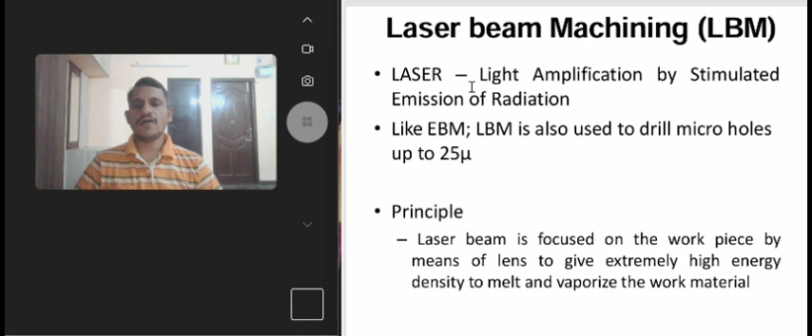Construction and working of laser beam machining. The schematic arrangement of the laser beam machining process is shown in the figure. There are several types of lasers used for different purposes, for example solid state laser, gas laser, liquid laser, and semiconductor laser. In general, only the solid state laser can provide the required power levels.

The most commonly used solid state laser is the ruby laser. It is the first successful laser, achieved by Maiman in 1960. It consists of a ruby rod surrounded by the flash tubes. This is the ruby rod surrounded by the flash tubes. Synthetic ruby consists of a crystal of aluminum oxide in which a few of the aluminum atoms are replaced by chromium atoms.

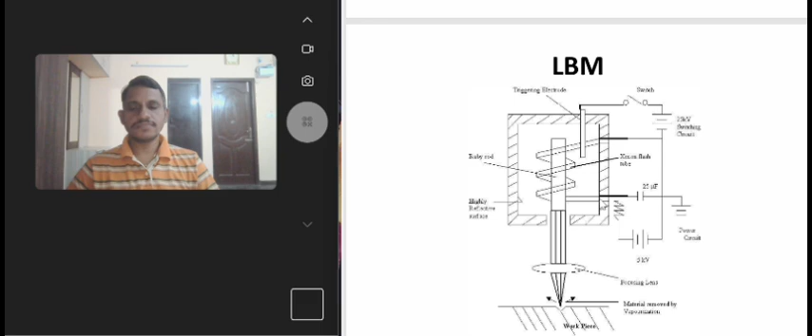The laser head is transferred over the work material by manually adjusting the control panel, and an operator can visually inspect the machining process. The actual profile is obtained from a linked mechanism made to copy the master drawing or actual profile placed on a nearby bench. This is another schematic diagram of how the laser beam is focused on the workpiece.

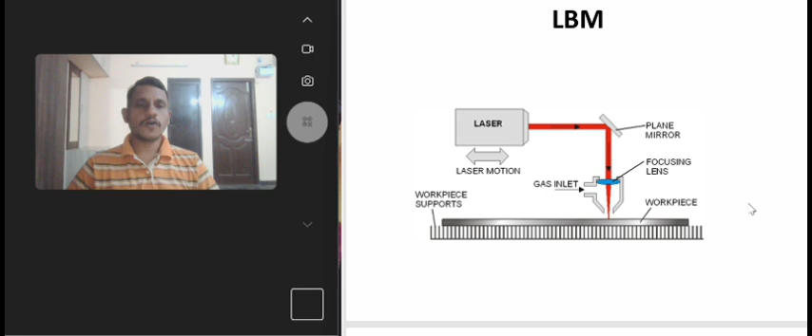Accuracy of laser beam machining. The laser beam is used for cutting and drilling. In order to achieve the best possible results in drilling, the material should be placed within a tolerance of plus or minus 0.2 mm of the focal point.

Laser materials used in the laser beam machining process. Many materials exhibit lasing action, but only a limited number are used in metal working. Solids, gases, and semiconductors can be used as lasing materials. Solid state lasers: the ruby laser, the neodymium doped yttrium aluminum garnet, Nd:YAG laser, and the neodymium doped glass laser, Nd-glass, are examples of solid state lasers. The most commonly used solid state laser is the ruby laser.

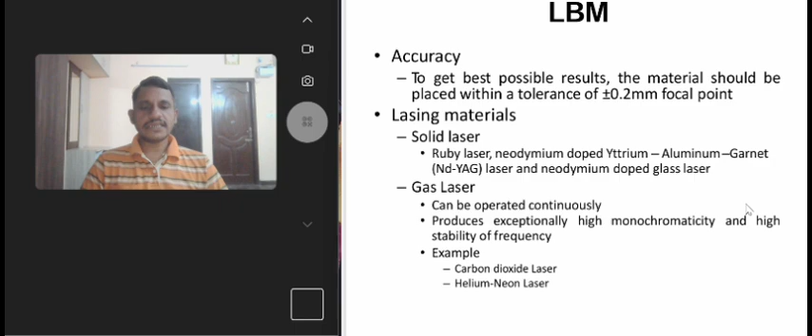Gas laser. The main advantage of a gas laser is that it can be operated continuously. The gas laser produces exceptionally high monochromaticity and high stability of frequency. The output of the laser can be changed to a certain available wavelength. So gas lasers are widely used in industries. Examples are the carbon dioxide laser and helium neon, which is called the He-Ne laser.

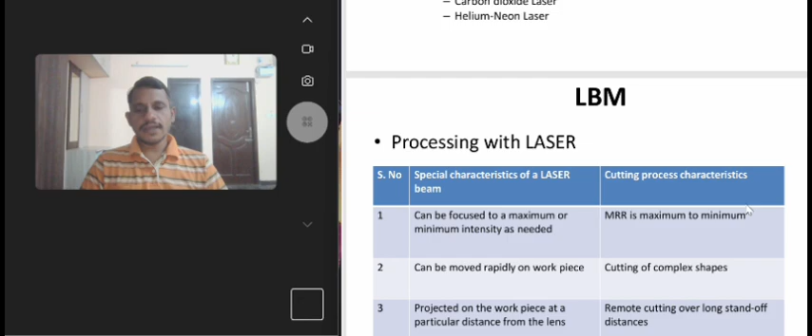Third one is semiconductor laser. Lasing action can also be produced in semiconductor. The most compact type of laser is semiconductor laser. It is also known as injection laser. In its simplest form, the diode laser consists of a PN junction doped in a single crystal of a suitable semiconductor, for example, gallium arsenide.

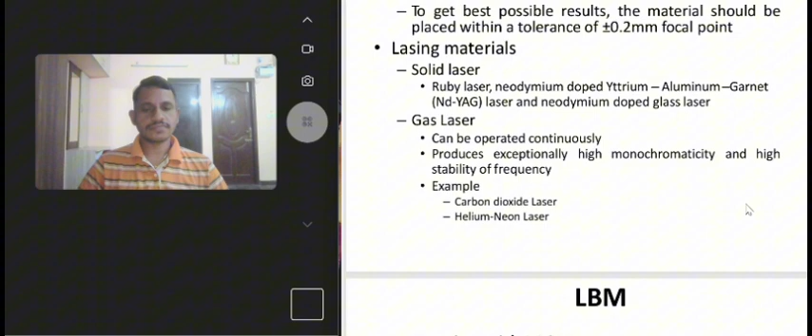Processing with lasers. It can be focused to maximum intensity or to minimum intensity as needed. Cutting process characteristics: metal removal rate is maximum to minimum. Second point, in special characteristics of laser beam, it can be moved rapidly on the workpiece. In cutting process characteristics, cutting of complex shapes.

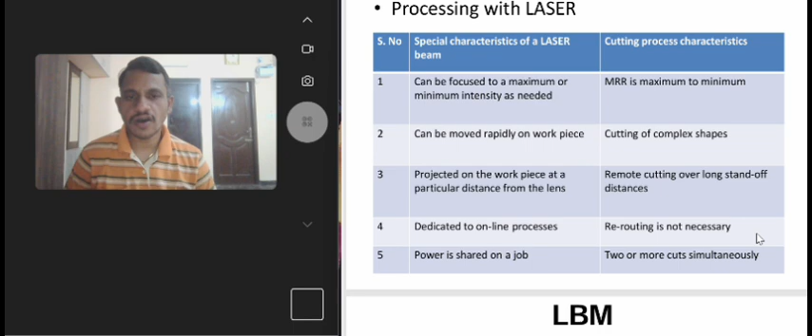Third point, it is projected on the workpiece at particular distance from the lens. Special characteristics of laser. Cutting process characteristics: remote cutting over long standoff distance. Dedicated to an online process. Rerouting is not necessary. Power is shared on a job. Two or more cuts simultaneously.

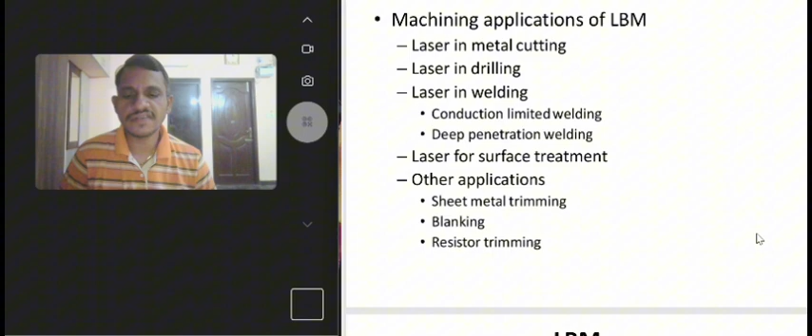Machining application of laser. A laser has a wide range of machining applications. Laser in metal cutting. A laser beam can be used for cutting metals, plastics, ceramics, textiles, clothes, and even glasses when its surface is coated with radiation absorbing materials such as carbon. Normally, laser cutting starts by drilling a hole through the workpiece, then moving along a predetermined path of a shape to be cut. Steel, titanium, nickel, and plastic can be cut easily by using laser beam.

But cutting of aluminum, metals, and copper is very difficult, since these metals tend to reflect the applied heat. The cutting speed of the laser depends on the material being cut, its thickness, frequency, physical characteristics, and the output power of the laser beam.

Laser in drilling. Laser drilling was one of the first practical applications of laser technology in industry, and the demand for laser drilling is increasing. Hole drilling by laser is a process of melting and vaporizing unwanted materials by means of narrow pulsed laser operating at 3 to 95 pulses per second.

Due to melting and vaporizing process, high accuracy is not possible in laser drilling. So laser drilling is not suited for deep hole drilling and for producing perfect cylindrical holes. Laser drilling is used in watch jewels, diamonds, dies, and other machining parts for various industries where a particularly high level of precision is not demanded.

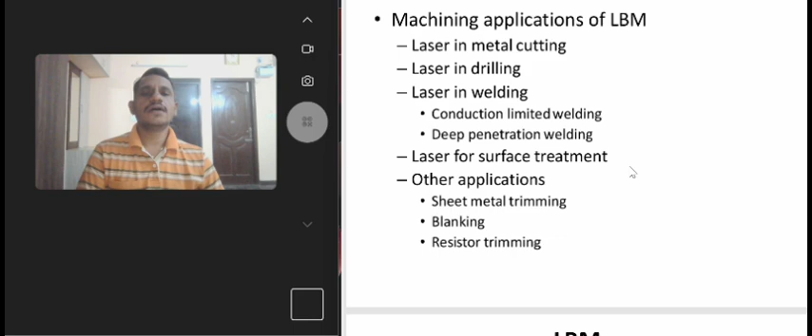By using laser, a thin ceramic coating is applied on a metal surface for heat and wear resistance. Other applications are sheet metal trimming, blanking, resistor trimming. Advantages. Before that, we will see the characteristics.

Metal removal technique: heating, melting, and vaporization of a material by using high intensity laser beam. Work material: all materials except those having high thermal conductivity and high reflectivity. Tool: laser beam of wavelength range 0.3 to 0.6 microns. Power density 10^7 watts per mm square. Output energy of laser 20 joules.

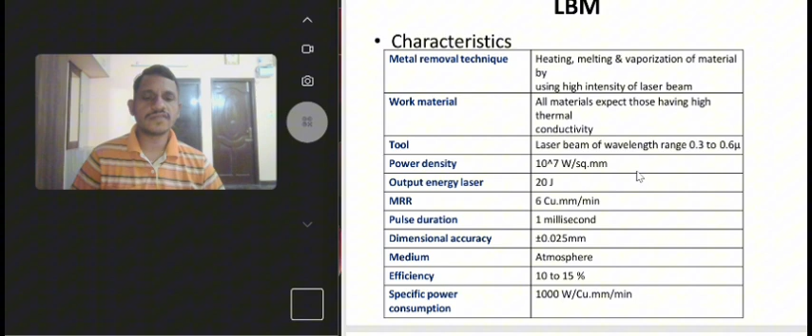Material removal rate 6 mm cube per minute. Pulse duration 1 millisecond. Dimensional accuracy plus or minus 0.025 mm. Medium atmosphere, efficiency 10 to 15%. Specific power consumption 1000 watts per mm cube per minute. Next, we will see the advantages.

Machining of any material including non-metals is possible. Micro-sized holes can be machined. Soft materials like rubber and plastics can be machined. Unlike conventional machining, there is no direct contact between tool and workpiece. There is no tool wear. Laser beam can be sent to long distance without diffraction. It can also be focused at one point, thereby generating large amount of heat.

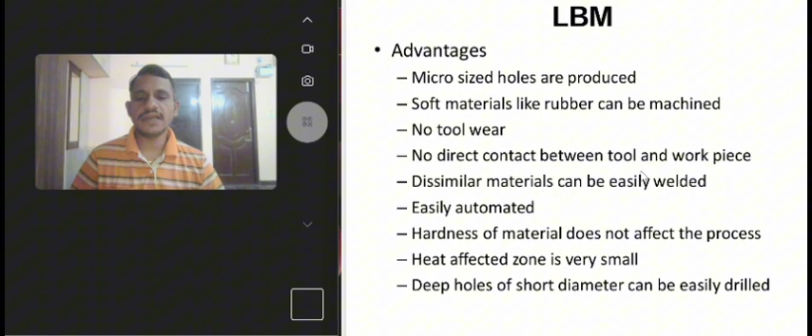Properties of the material do not affect the process. Dissimilar materials can be easily welded. Heat affected zone is small around the machined surface. Beam configuration and size of exposed area can be easily controlled. Deep holes of very short diameter can be drilled by using unidirectional multiple pulses.

Disadvantages. Initial investment is high. Operating cost is also quite high. Highly skilled operators are needed. Rate of production is low. Possibility of machining only thin sections and where a very small amount of metal removal is involved. Safety procedures to be followed strictly. Overall efficiency is extremely low, 10 to 15%.

Some materials like fiberglass reinforced material, phenolics, etc. cannot be machined by laser as these materials burn, char and bubble. Life of flash lamp is short. The machined hole is not round and straight.